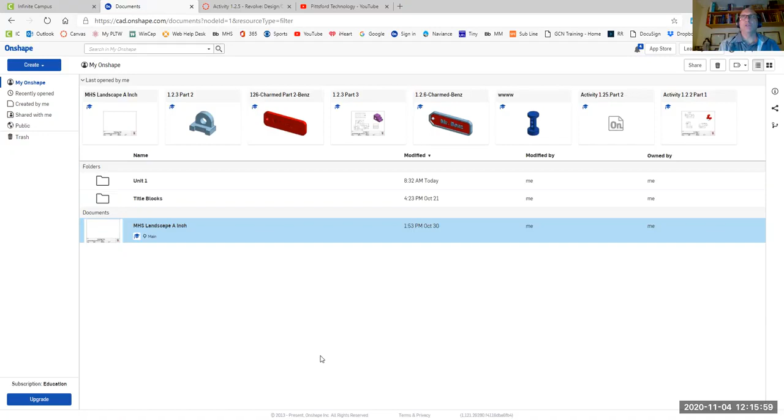Next, we're going to open up a part. And you can see that I have a simple part open. I'm going to go down in the very bottom left-hand corner of my area, and there's a little plus sign down there. I'm going to click on that plus sign and you'll see where it says create drawing. So let's select create drawing.

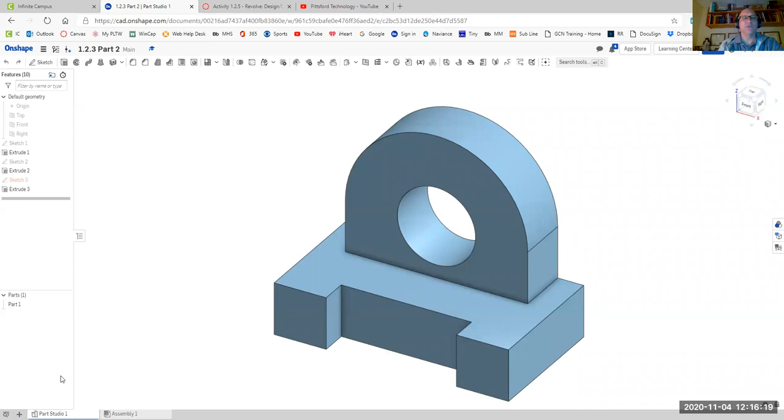This time you're actually going to go up here where it says created by me. And you should see that template loaded up, the one that you copied the workspace in. So we're going to hit OK on that. This will take a second to load up. And there's my title block loaded up.

Now what you'll notice is another window will pop open over here on the left-hand side. And you will see your part right there. So what you're going to do is double click on that part, and move your cursor over onto your title block. This will be your front view.

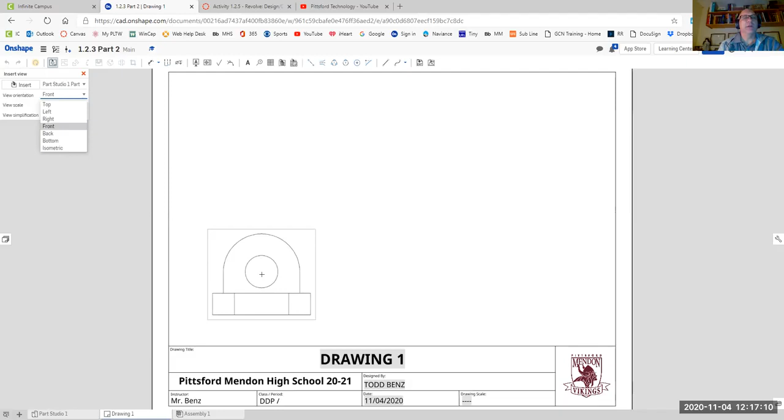If you don't want your front view, there's another window up here on the top corner. You can actually pick different views, but I'm going to say 99% of the time you're going to leave it as front view. You can also go up here if you want right now and change the scale, but later on I'll show you how to change the scale. So I'm just going to plop in my front view right there.

Now Onshape's going to allow me to scroll up here straight above and left click again and put in the top view. Now to get the other two views, I'm going to have to escape twice. I'm going to go up to my menu bar and the second icon in is called projected view. So I'm going to click on that. I'm going to come down to my front view, left click on it and move my cursor straight over. This is going to allow me to put in my right side view.

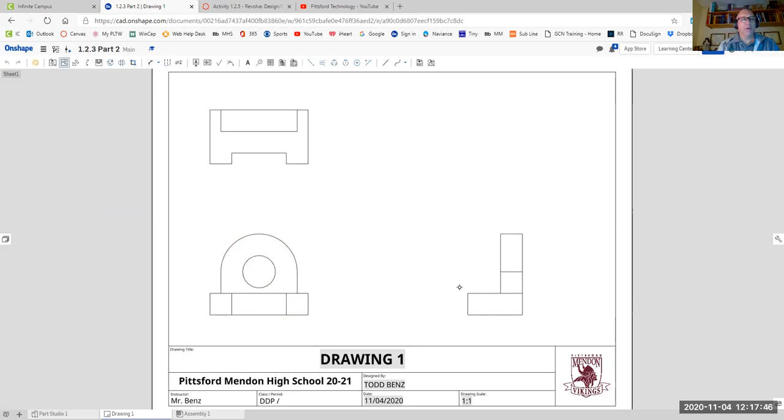I'm going to hit escape again twice, go back up to projected view, click on projected view, come back down on top of my front view, left click again, and come up here and we want to put our isometric view in. There we go. And I'll left click and place my isometric view.

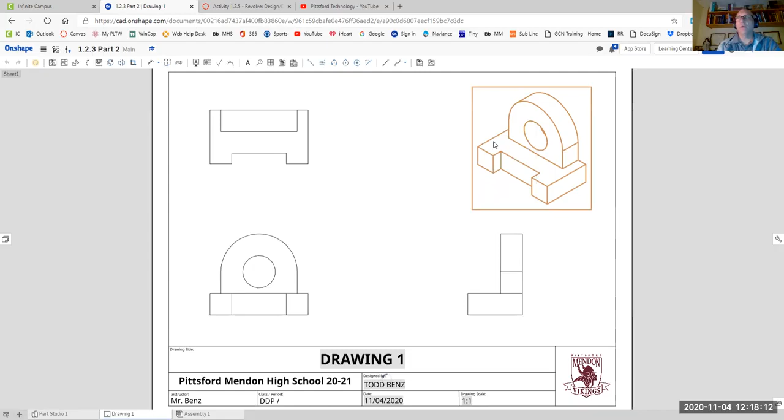Now the first thing we're going to do is escape and get out of that command. I'm going to come over to my isometric view, right click and select show shaded view. I want to shade in my isometric. My next thing is on all three of my views, I'm going to right click and show hidden lines on all of them. So I'm going to select show hidden lines and bring in all my hidden lines. All right, looking pretty good.

So you can see that I have a circle or an arc. So the next thing I want to do is go up on the top. You'll see a little round circle with an X through it. That's called center mark. I'm going to select that. I'm going to select the outside edge of my circle or my arc, either one. Okay, these both happen to share the same center point. They're concentric, so I'll only see one of them in there. Now I want to put my center lines in.

And the center line is this little command right here. It's called edge to edge center line. So I'll select that. And I know that my circle is in between these two hidden lines, so I'm going to select those two. And you can see that it puts a center line through. And same down here.

Now this one is actually covered up by the object line. The object line precedes any hidden line or center line, so that will be on top. So that's why you can't see it, but you can see that the little pieces stick out on the ends. I'm not going to have to do one here because that's actually not a round hole. That's actually a square. So I don't have to do a center line down here.

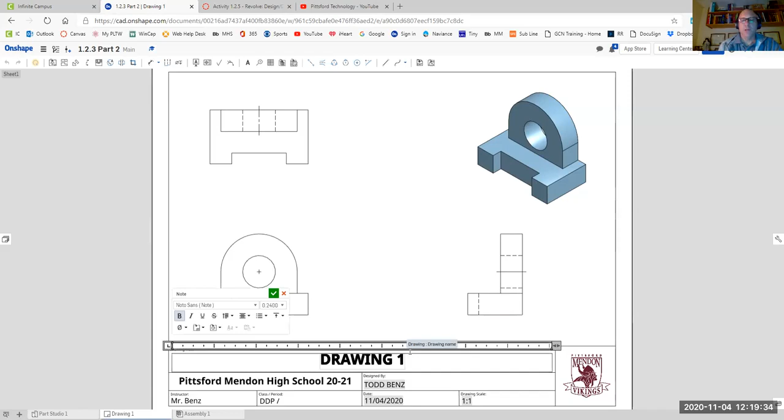The next thing I want to do is I want to come down here and I want to edit my title block. So I'm going to hit escape and get out of that command. I'm going to double click on that. And then I'm just going to backspace this out and I'm going to give this a name. Let's hit the green check mark, finish that off. Come down here where it says DDP, double click on that. And all I'm going to do in here is I'm going to put whatever period I'm working in.

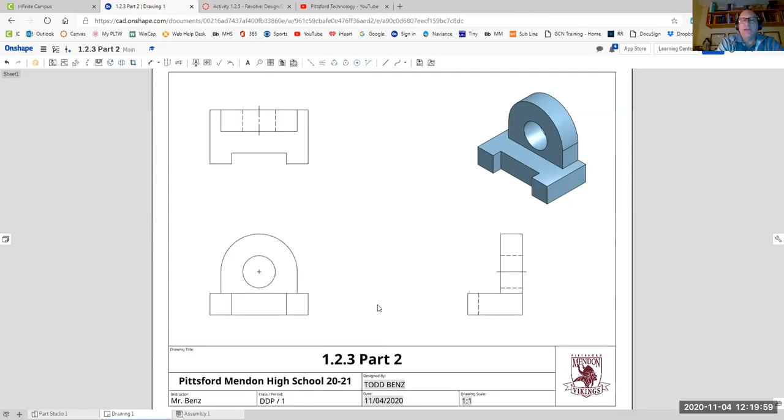Okay, so we're looking pretty good right now. So the way that I actually do dimensioning is I always want the overall height, width, and depth thrown into my parts right away. So my overall height can be either found on my front view or my right side view. My overall width could be found on my front view or my top view. And my overall depth can be found on my top view or my right side view.

Now, most of the time you could put most of your dimensions right here in the front view, but in this case, I'm going to put some on the other two views, okay? Only because this has a rounded top and I want to be able to show it a little bit more on the square side. So I'm going to go up to dimension and I'm going to select the top here and the bottom there and pull my dimension out and make sure that I try to get my dimension in between the arrows. So there's my overall height.

My overall width, I'm going to show up here on my top view. So I'm going to click that corner and that corner, bring that down, try to keep my dimension inside the arrows. So now I have my height, my width. I need my depth. So for my depth, I'm actually going to pick this one right here. And this will show me my depth. And I'll put that right about there.

Next thing I want to do is I want to look to see where I have any circles or arcs. And I want to locate all those. And you have to locate them to the center line. So there's my circle. I'm going to grab that right there. And maybe I'm going to grab this bottom edge. And I'll bring that right over there. So now I've located my circle up and down. I need to locate it left and right. So maybe I'll grab that edge and I'll grab that center mark and plop that in.

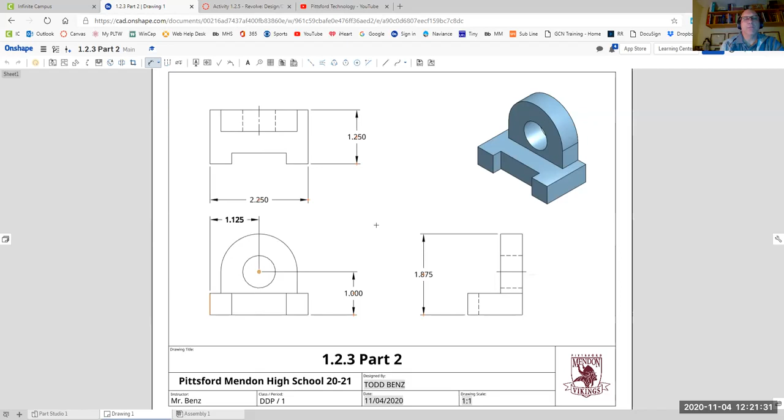And the last thing is I need the correct size. So let's click on the outside edge of the circle and put that in. I also have this large arc, so I want to make sure I grab that. And because I see the same center mark, I do not have to locate that up and down or left and right.

So now I'm going to go look at my parts and I want to look at where all my, what they call contours are. So if I look over on the right side here, I can see that my part goes up and it goes in a little bit and then goes back up and then goes in. So I can see the contour. So what I want to do is I want to always try to do all the contour parts that stick out the farthest.

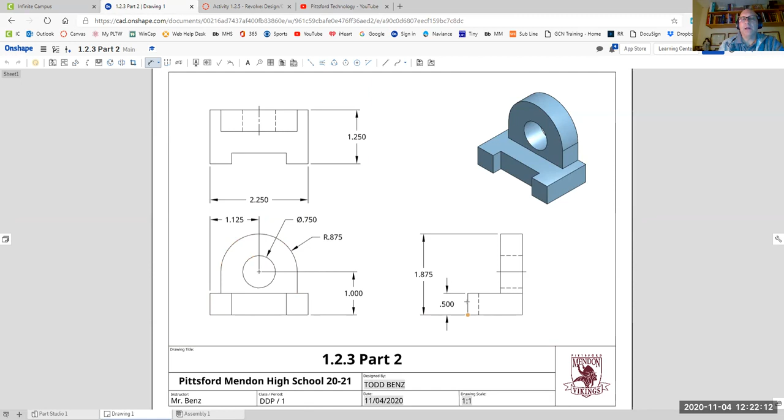So I'm going to come over here and I'm going to grab that little piece right there and I'll plop it in. So the way we do this is I'm going to start here at the bottom and I'm going to go up, over, up. So I've said up twice, which means I need two dimensions. One is going to be my overall, and I need one other one.

All right, and now I'm going to start on the left side and work my way to the right. So if I do that, I'm going to go over, up, over. So I've said over twice, so I need two dimensions. Well, one of them is going to be this one right up here, my overall that's shown on my top view. So I need at least one more. So I'm going to click this one right here and put that right in.

I'm going to actually work my way over to the top view. I'm going to do the same thing. So I'm going to go over, up, over, down, over. So I said over 3 times. So I need 3 dimensions. Well, I have my overall. That's 1 dimension. So I'm going to see these 2 parts. They stick out the farthest. So I'm going to try to grab those and do those next.

Okay, so that's looking pretty good. I also have this little notch sticking in here. Okay, and I can see it. So I need to show how deep that is. So I'm going to grab that little notch and bring that out here. All right, so let's start looking to see what we have. Do we have all the dimensions? Well, do I need this little piece right here? No, because I'm showing it over here.

Do I need to locate where this piece is left and right? Well, not really, because I know that it's showing me that the radius of this piece, so from the center of the circle out to here, is 0.875. And it's 0.875 there. So do I need to locate it? Well, yes, you probably should locate it just in case. So I'm going to put one more dimension. I'm going to pop it right in there, just so I know where this is going to start and show that this is actually centered on my piece.

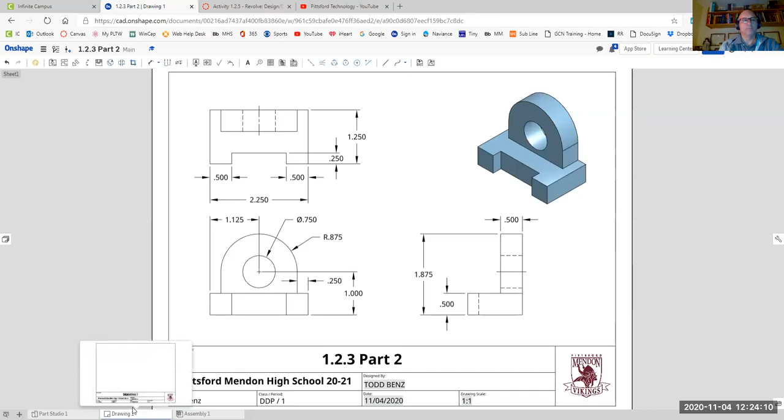And pretty much that is all I'm going to need to do this part right here. Okay, I didn't dimension to any of my hidden lines, which is a no. I didn't dimension any of my center lines, only my center marks. So I'm pretty good on this part. So now if I want to share this drawing with anybody, I'm going to exit my command. I'm going to go down here where it says drawing 1 on the bottom, and I'm going to right click and select export.

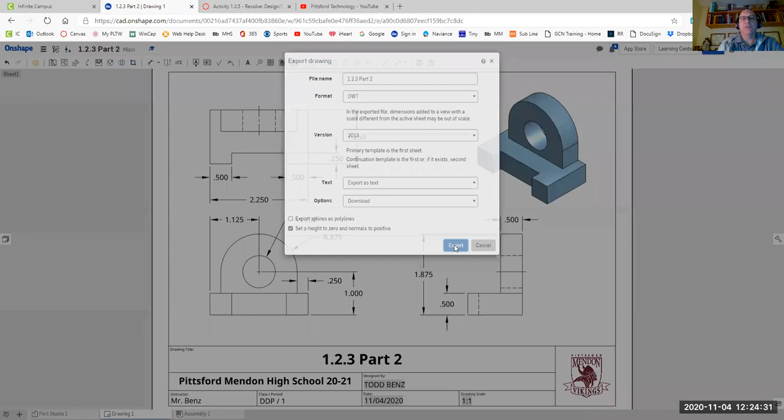Okay, I want to make sure I give it a good name. So I think I called this 1.2.3 part 2. Give it a good name. The version I'll leave as is. Export it. Yep, everything looks good. We're going to make sure that it goes to our downloads. So we're going to hit export. Okay, and then if I want, I can go and open it up on my export. That's one way to do it.

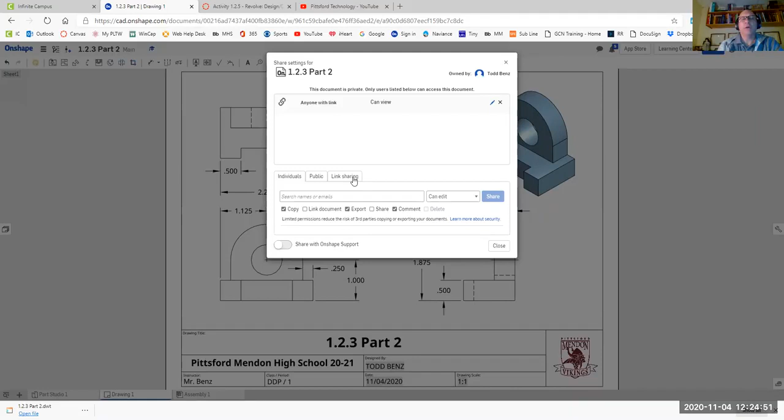Another way, if you want to share this document, is if I come up to the top right corner and I select the word share, this little window will open up and I want to click on link sharing. Now, if you haven't done this before, it might say to turn on link sharing. So there might be a blue button here that says turn on link sharing. I've already done that, but you'll have to do that first. And then this little area will pop up.

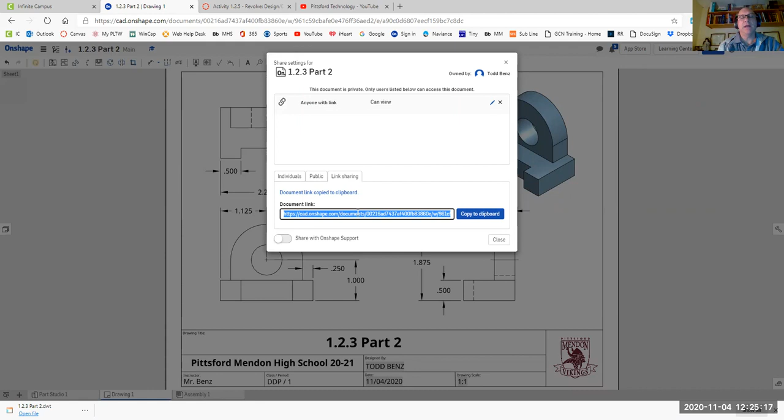You're going to hit copy to clipboard, and there is your drawing. You can paste this into a document. You can send this to someone, and once they click on it, it'll take them right to this drawing. Okay, so I hope you like this video on title blocks and dimensioning.